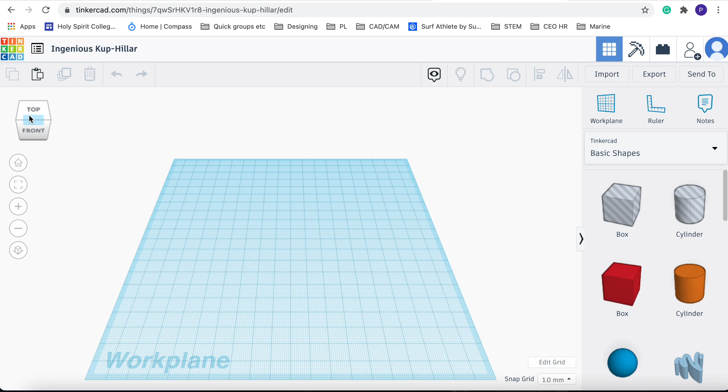Let's have a go at making our own little flower pot. Over here we've got our navigation wheel. We can switch our view to orthographic, which will make it flat, and toggle around through our different views.

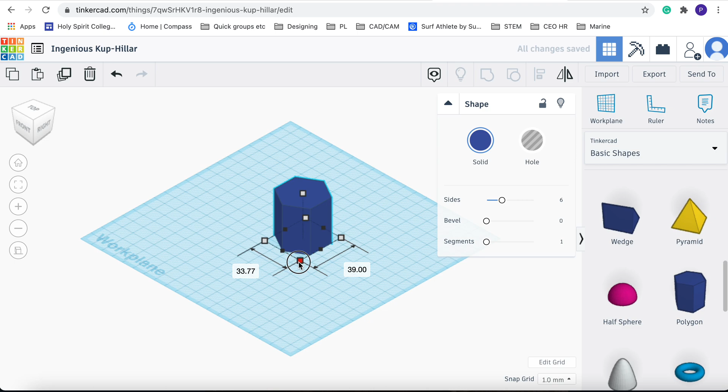To start off with, I'm going to place a polygon. We can just drag and drop the shape and then change its size. If I hold the shift key down and drag out, I can drag it out to a uniform size, and I want to drag it out so it's 50 millimeters.

You can also do direct entry, 50 millimeters and 50 millimeters. Height wise, I also want to make it 50 millimeters, which it already is. And I want to change the color, so you can do that over here.

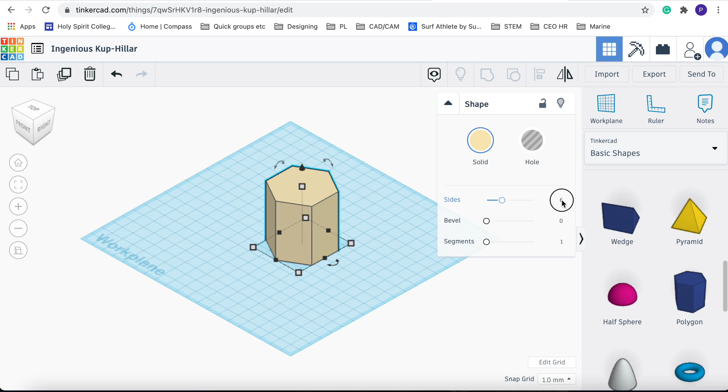That's just the outside of my little planter box. I'd like to make it 12 sides. It's currently 6, so I'm just going to click on the shape again and change that to 12.

And then it updates. The next thing I want to do is put a hole in it so I can put soil in there. So I'm just going to use the cylinder.

These ones up here can actually create holes, so I'm going to drag this one out. Using the shift button to keep it a uniform size, I'm going to drag it out to being 40 millimeters, and make it 45 millimeters high, 5 millimeters shorter than the polygon.

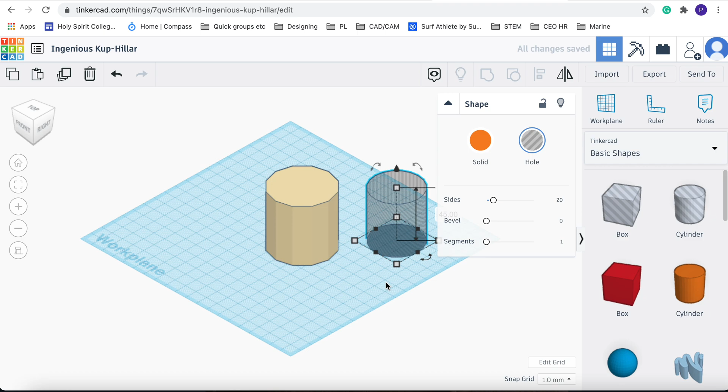Now what I need to do is drag a box around both objects, and I'm going to use this tool called Align up the top here. I want to align it with the top.

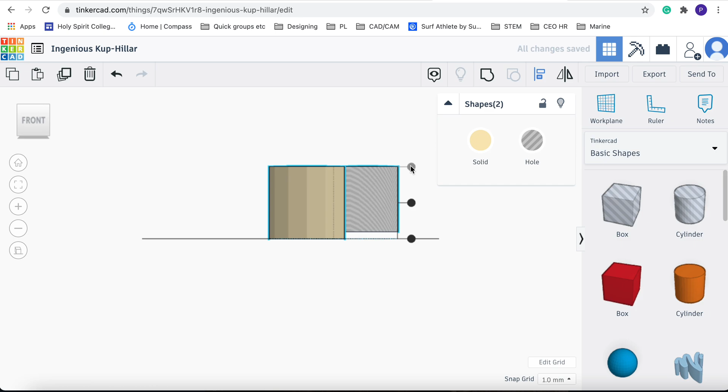Using my little navigation wheel over here, I can click this little button, and that's going to align the cylinder with the top of the polygon. That's how I want that to go.

The other thing I want to do is make sure it's centered. So I'm going to again drag a box around everything, looking at it from the top, using the Align tool. I'm going to align and align. That's now in the center.

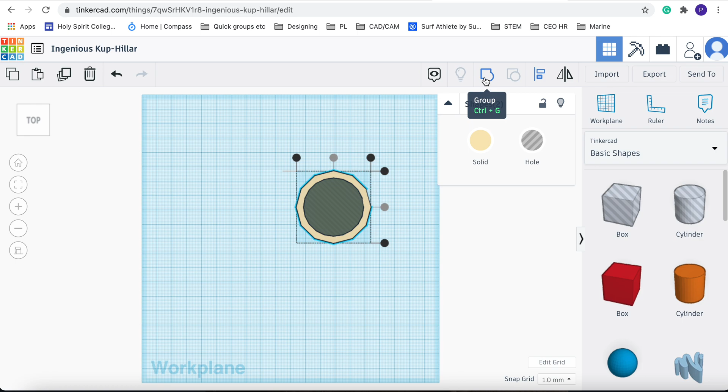Now I need to group the two shapes to merge them together. This little icon here is group. That now creates a little open vessel that we can put our soil in.

The next thing we need to do is add in some drainage. I'm just going to come here, go to shape generators, and go to all. We can actually save these because there's a lot of shape generators we can use.

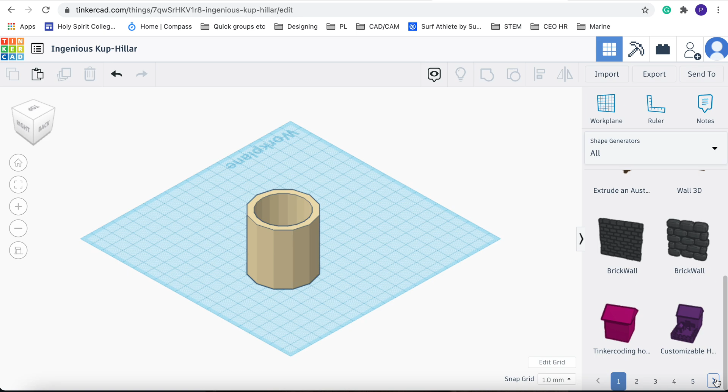I think the circular array is on about page 13, so you do have to scroll through a fair bit to get to it. But once we get there, you can mark it as a favorite and then just go straight to it. It's something I've marked as a favorite, but I'll just show you how to find it.

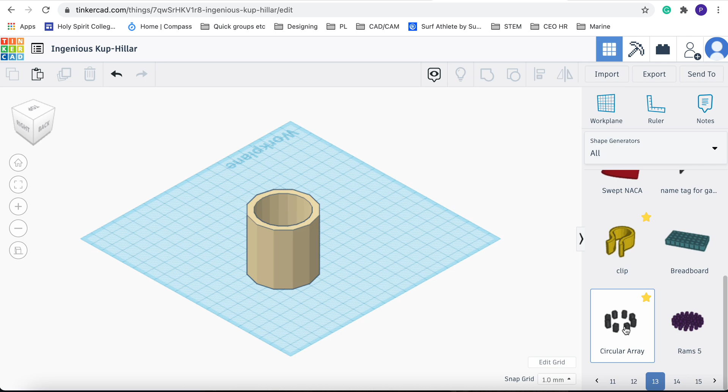Okay, circular array. With this one, we just drag and drop. And if you do want to make that a favorite, you just put that little star button there. So the types of shapes I want to have—I want to make it circular holes, and I want to have 5 holes.

And I want to make it much smaller because it's got to fit inside my pot. So I'm going to drag that down to about 30 millimeters, using the direct entry method there.

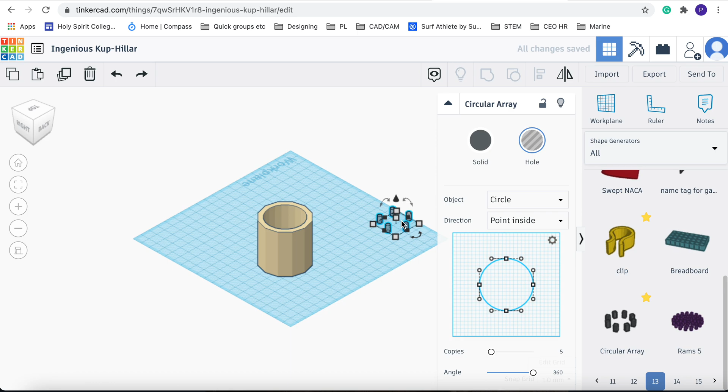Height wise, at the moment it's sitting as a solid. I want to change it to create holes. I'm just going to make it—oops, just undo. Height wise, I'm just going to make it quite high because it doesn't really matter.

So just dragging a box around the two, using the Align tool, I want to align it in that direction and in that direction. I can check inside to see it looks good, and that will be quite good for my drainage holes.

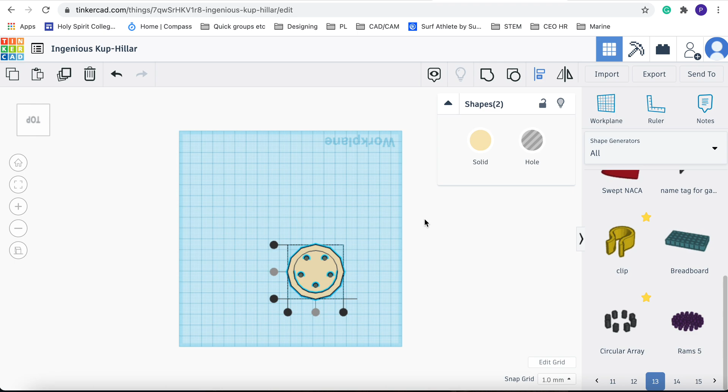If I want to adjust anything there, I could. And then I'm just going to go to group, and then double check to see that I can see through, which I can. So that's now ready in a very basic form to send to the 3D printer.

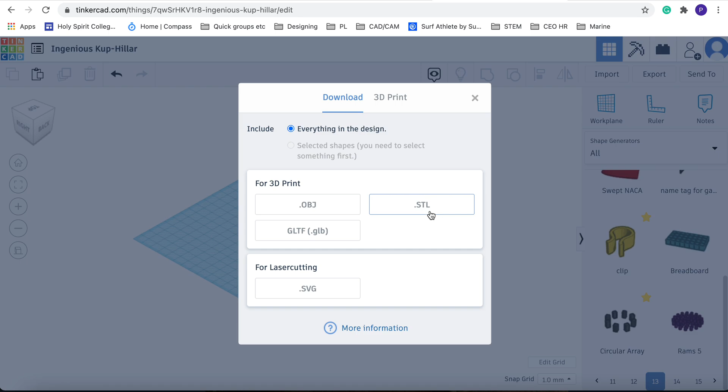So we can go to export. We're going to export it for 3D printing as an STL file, and you can see it just downloading there.